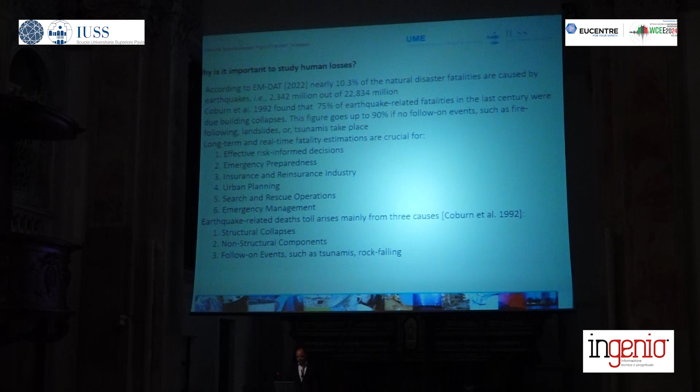And why is it important? Long-term and real-time fatality estimation are crucial for effective risk-informed decisions, emergency preparedness, the insurance and reinsurance industry, urban planning, search and rescue operations, and emergency management. Earthquake-related death tolls arise mainly from three causes, but not only from three. So the causes are structural components, non-structural components, and follow-on events such as tsunami, rock falling, landslides, and fire following.

Let me introduce you to the current state of the practice in fatality modeling, and I'm starting with a famous paper of Coburn et al. 92, where the estimated number of fatalities depends on the probability of collapsed buildings and the number of collapsed buildings, the number of occupants at the time of the earthquake, and the number of people that are trapped inside the building in the moment that the building collapses. And this parameter is really important because it is related to the building volume reduction.

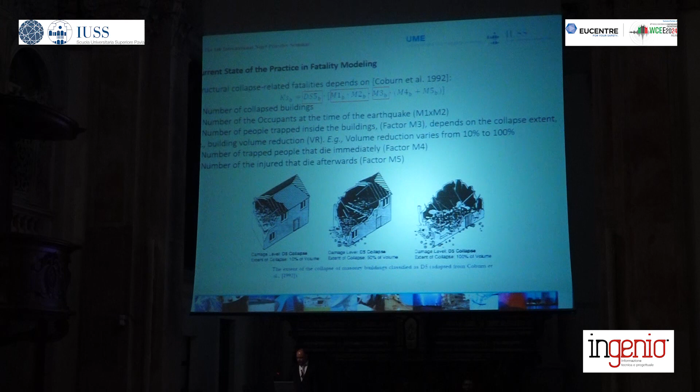So, for example, if you see the picture below, for economic losses purposes, the building is classified in damage state 5, so the loss ratio can be 1 or a bit more than 1. But when it comes to fatality estimation, going from left to right, we see that volume reduction changes dramatically from 10% to 100%. So trapped people will follow the same trend. And then it is the parameters M4 and M5 that consider the number of people that die immediately or the people that are injured but die afterwards.

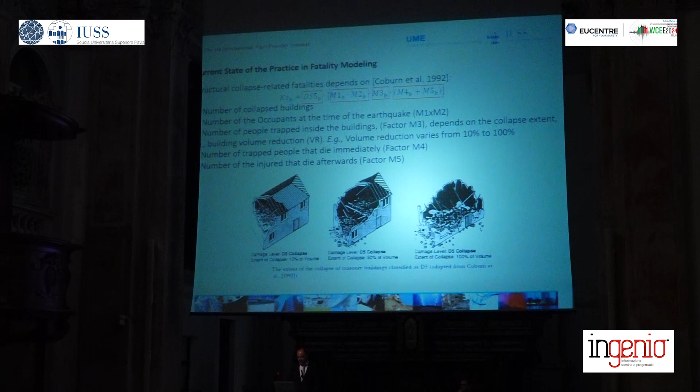So similar work was conducted by Spence in 2017, and he proposed 12 archetype buildings based on past events including the Northridge, Kobe, and Athens earthquakes. So he proposed fatality ratios. And in 2013 it was So and Spence again that proposed empirical fatality rates, completely empirical, based on a database that contains damage data for 53 earthquakes. And the novelty here, as compared to the two previous works, is that they offer fatality rates related to damage state 4. Can you see my mouse?

Okay, so this is the fatality loss ratio associated with the complete damage state. And then in 2016, in her book, So provided judgment-based empirical fatality rates based on data from 25 major earthquakes. And still, in her work, she emphasized the role of volume reduction on the fatality rates.

And then we move on to So, Baker, and Spence in their paper in 2018. Among other topics they studied in their paper, they stressed again the importance of establishing a relationship between fatality rates and the volume reduction of collapsed buildings. So, for example, if a soft story collapse takes place, 10 up to 20% of the building will be reduced. But if a pancake collapse takes place, then about 100% volume reduction. And in light of very limited empirical damage data, they encourage the application of advanced 3D analysis for collapse assessment and volume reduction.

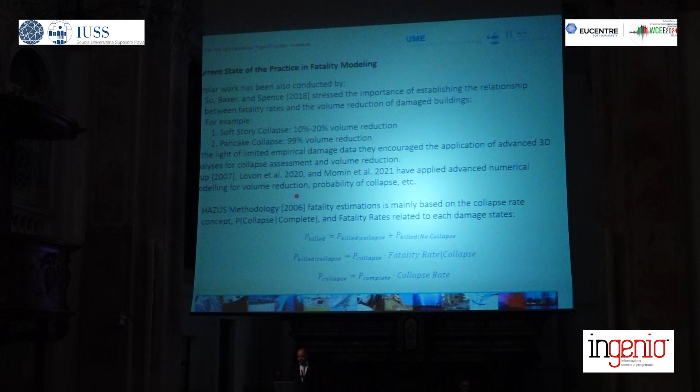And following this philosophy, Arup in 2007, Lovon et al. in 2020, and Momin et al. in 2021 have applied advanced numerical modeling for estimating volume reduction and the extent of collapse. For example, Arup estimated the area impacted by the debris and, among other parameters, the probability of collapse.

And then there is the well-known Hazus methodology for fatality estimation. They consider that fatalities come not only from collapse, but they offer fatality rates even for less severe damage states. But basically, the main part is fatalities related to collapses. And in order to estimate the probability of collapse, they establish this collapse ratio, which is the probability of reaching or exceeding a complete damage state times the collapse rate. And these collapse rates are basically 10%, 15%, which means that not every building classified as unrepairable is collapsed.

So the main limitation observed during the literature review is that the established metrics, fatality rates related to volume reduction and empirical collapse fragility functions, are based mainly on very limited damage data. And hence, these two parameters are the focus of my PhD dissertation.

Okay, and the content of the PhD is as follows. First, we will estimate empirical collapse rates and fragility curves based on a very extensive damage database for Italy, and then we will move to analytical methods. Then we provide analytic fragility and vulnerability functions, and then we verify these fatality vulnerability functions based on past events.

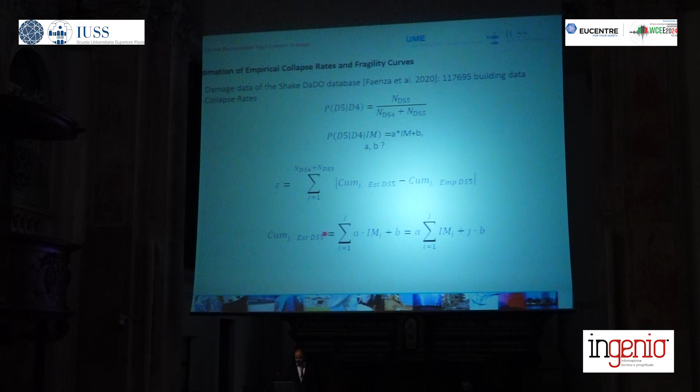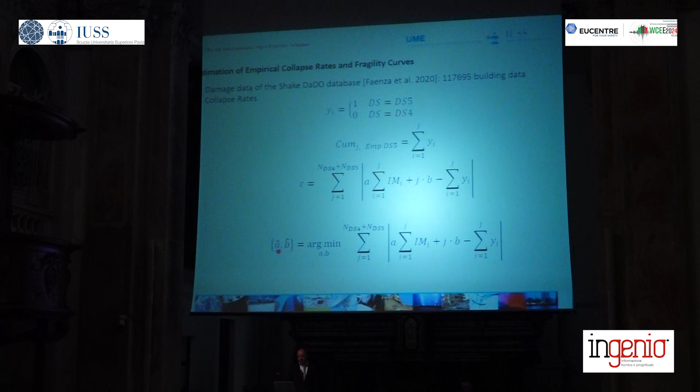Basically, this is the absolute difference between the estimated cumulative number of DS5 buildings minus the empirical cumulative number of DS5 buildings. The estimated cumulative relationship is adding up the probabilities of collapse. The empirical cumulative distribution is basically counting the buildings. And the best estimate parameters are the ones that minimize this objective function.

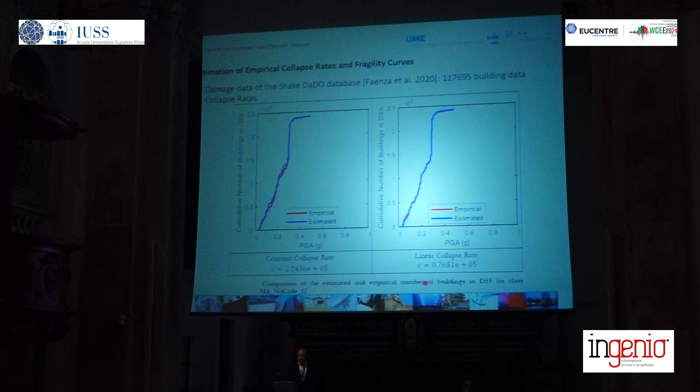In red, we have the empirical cumulative number of DS5 buildings, while in blue, on my left, we have the cumulative estimated number considering a constant collapse rate, and here considering a linear collapse rate. In terms of the error to be minimized, in the case of the linear collapse rate, the error is basically 3 times less compared to the constant collapse rate.

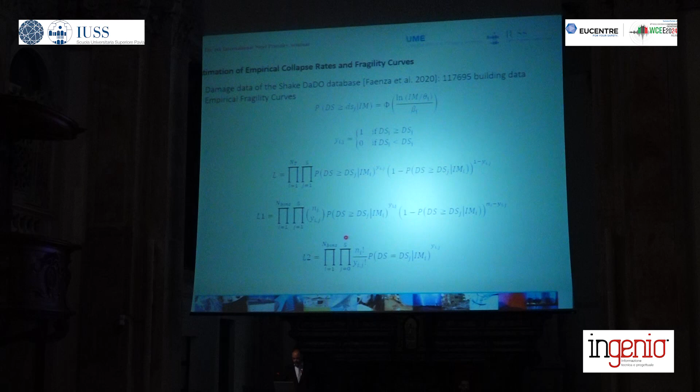So the parameters here are 5 medians and 1 standard deviation that is constant, and they are the ones that minimize this function here. We keep the logarithmic standard deviation constant to preserve the ordinal nature of the fragility curves, that is, the curves don't cross each other, and the probability of exceeding a more severe damage state is always lower than the probability of exceeding a less severe damage state.

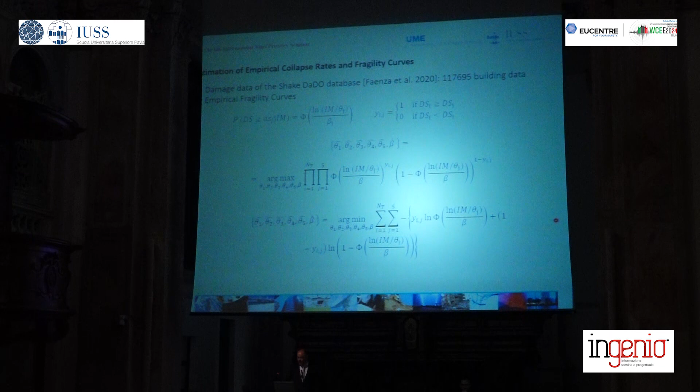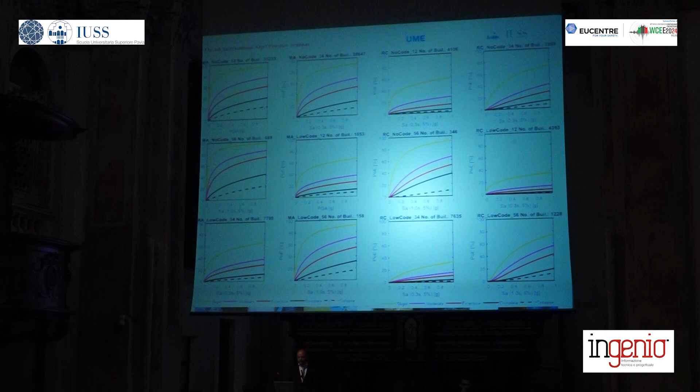And here we have the parameters for the 12 archetype buildings, and here are the fragility curves for the 12 archetype buildings, and we can see that in some of them the medians are very, very low. For example, here as well, here. And another factor that takes our attention is the logarithmic standard deviation, which is very high and gives this almost linear, flat shape of the curves.

And why might there be these, let's say, issues with our fragility curves? We think that one reason can be under-representation of undamaged buildings in the database. However, this does not affect the collapse rates. Another is the accuracy of the intensity measure computed based on the INGV shake maps.

For example, for very low intensity measures, like a PGA of 3 or 4%, we see that there are buildings that are collapsed. So we recognize the very high variability in the shake maps in the intensity measure. Anyway, I have to mention that this does not affect the collapse rates. Why? Because they are invariant to the intensity measure. But is there any way that we can benefit from these fragility curves?

I think yes, there is a way, like excluding completely the buildings that are in damage state 0 and computing conditional fragility curves. That means a fragility curve for damage state 2, let's say, given damage state 1, given intensity measure. So we can get conditional fragility curves, but in order to have a non-conditional, exact fragility curve, we have to have information about the probability of exceedance of damage state 1. So this could be done probably by numerical modeling.

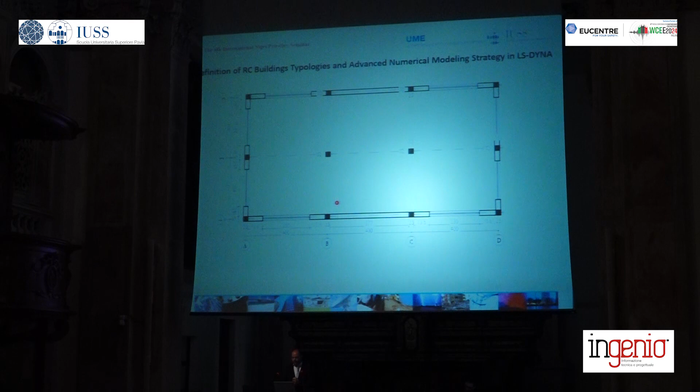We'll start with the definition of RC building typology and advanced numerical modeling. And why are we shifting from empirical to analytical? First of all, because we know exactly what the intensity measure is, because we just defined it. The first archetype is a masonry-infilled moment-resisting frame RC building typical of Nepal, India, Pakistan, a 3-story infilled building, and in order to consider adding stories to the buildings, we consider 2 more archetypes with 4 and 5 stories.

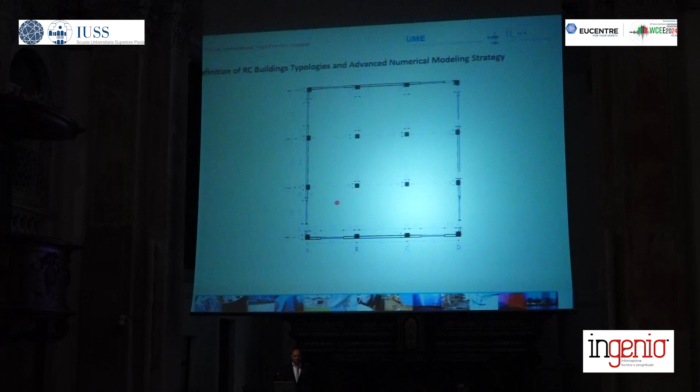Another archetype is a fully symmetric infilled RC building, typical of Italy and Europe, and this is based on the model from Tiziana Rossetto's PhD thesis. And sorry, I forgot to mention here that the information here is taken from Chaulagain et al. in 2013.

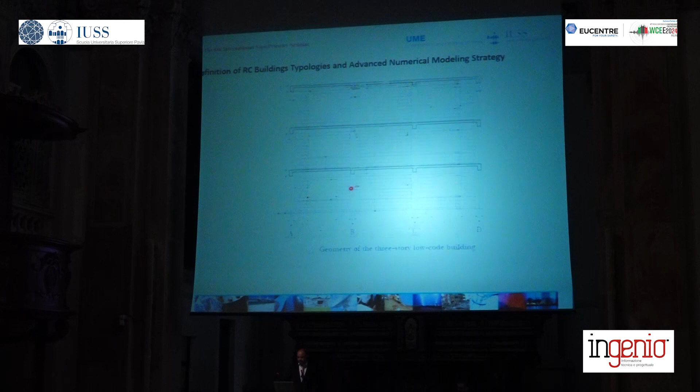What is the numerical method that we adopted? I'm going to show you what we ended up putting in my PhD thesis, but it was a very, very long way to end up with this methodology. So, to model the frame elements, beam and column elements, we used 1D elastic elements with concentrated nonlinear hinges at the ends, and the backbone of the nonlinear hinges is the backbone from Haselton et al.

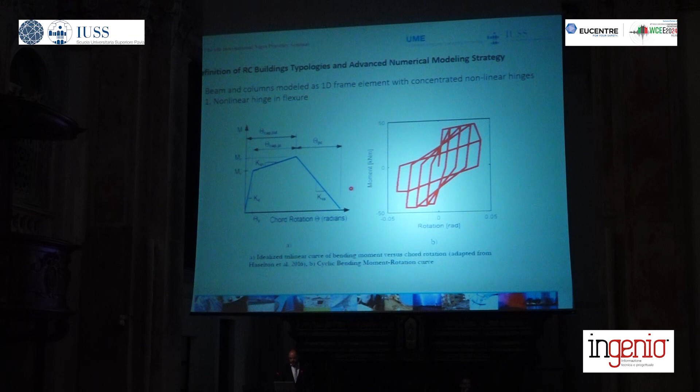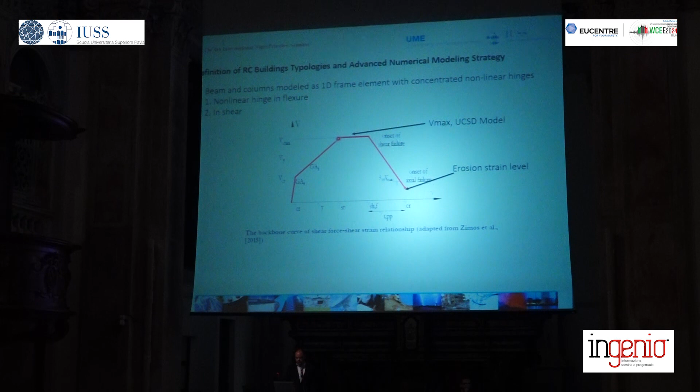2016, and here I show the cyclic response. We modeled the nonlinear behavior in shear, where the maximum capacity is computed based on the UCSD model in 2000, and this backbone curve is according to Zimos et al. in 2015, and they state that there is a point where if the shear strain hits, the column will lose its axial force capability, and so the column will not be able to carry axial load anymore.

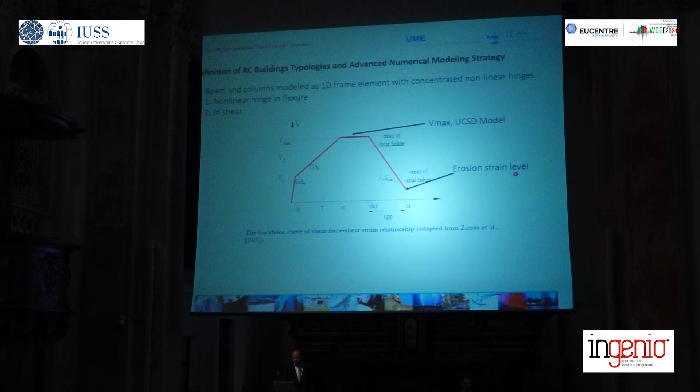And we consider this in our numerical model by imposing an erosion strain level. So the moment that the strain level hits this target here, the element will be deleted from the model. And then we have here the backbone curve in tension and compression and the cyclic behavior.

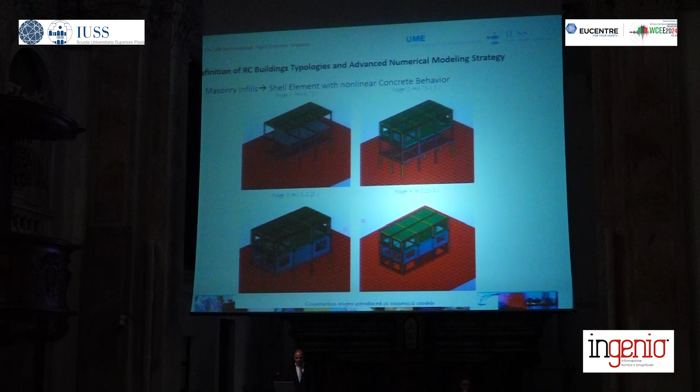In order to make sure that infills really work as such, so that they don't get extra load, but they only carry their own load, we apply the construction stages in the model. And in order to model the ground, we use shell and solid elements with elastic elements that represent the ground, and I use many different moduli of elasticity.

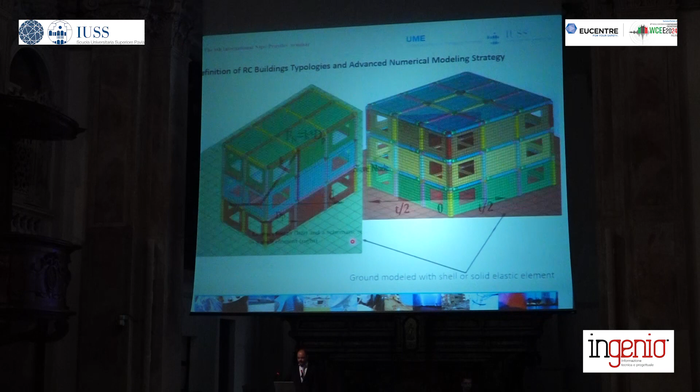In order to consider the impact of building elements with each other and the interaction of building elements with each other and with the ground, we imposed in the model the contact algorithm. Basically, the program will recognize the interaction between them.

And finally, with this part, we used around 60 ground motions for each numerical model. They are 3D ground motions, and the selection strategy was guided by the need for the uniform distribution of the selected IMs, that are spectral acceleration and average spectral acceleration.

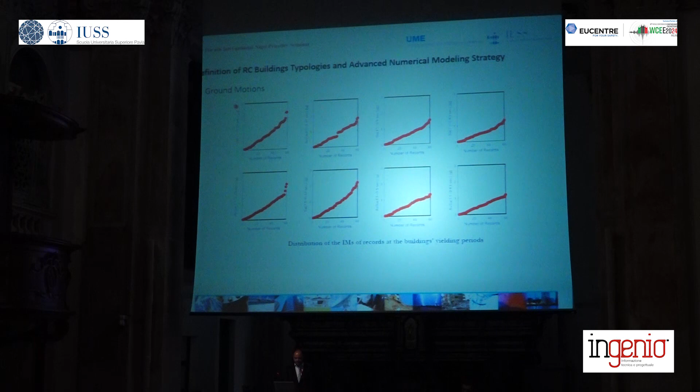And before going to the results, I would like to state that the earthquake effect in the building is treated as a wave propagation problem and not as a vibration problem. So we consider the wave speed in the building. The software is capable of doing that.

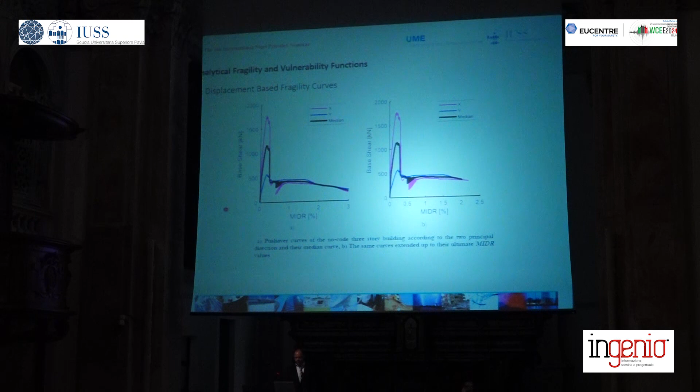So let's move to analytical fragility and vulnerability functions, and we'll start by presenting displacement-based fragility functions. This damage model is based on the maximum interstory drift, and these damage results are estimated in the median pushover curves, because the first building is not symmetric, and it has two different backbone curves. So we will work with the median backbone curve.

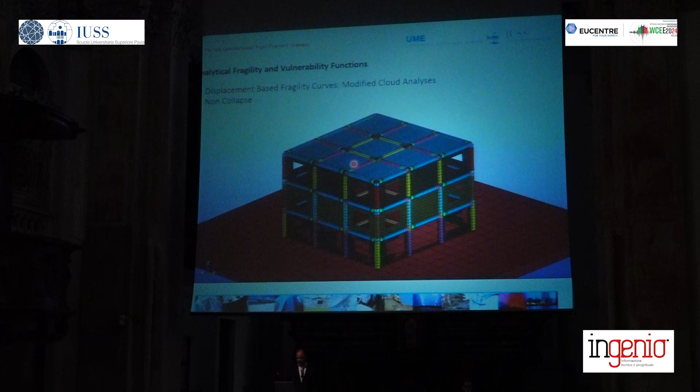And in order to estimate fragility curves, we have run cloud analysis, and we use a modified cloud approach to compute the fragility curves, where we take into account the explicit collapses and non-collapses. So let me introduce.

Okay, this is a video. It's supposed to run. Okay.

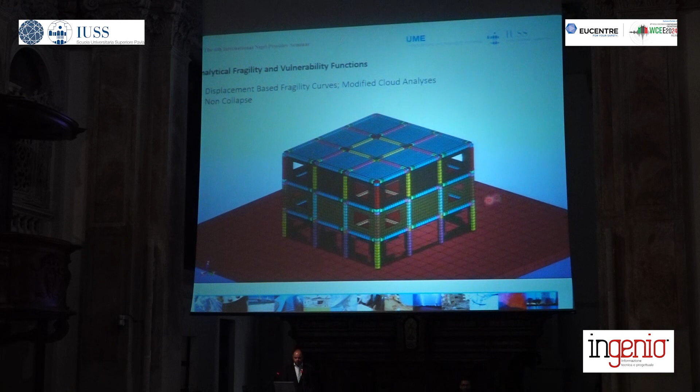In any case, this is the final configuration of the building. We see that we have lost the infills, and the infills that are missing here are missing because they are so distorted, and we applied very high erosion criteria.

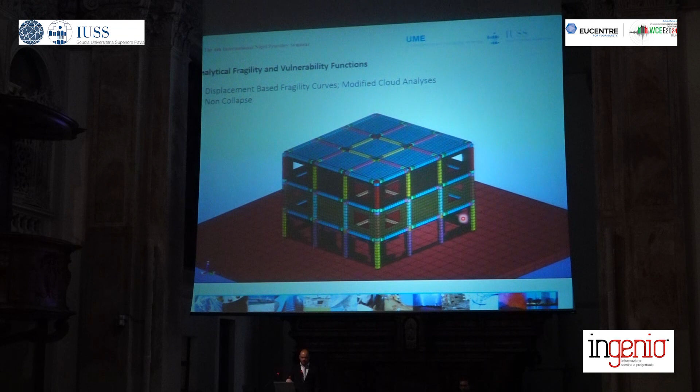Okay. So now finally it is moving. So here we applied the infills in the model.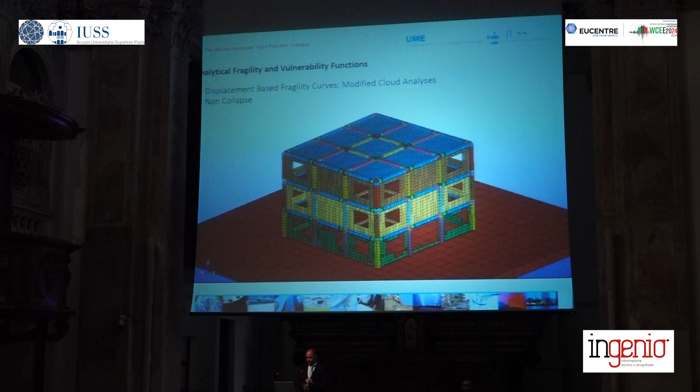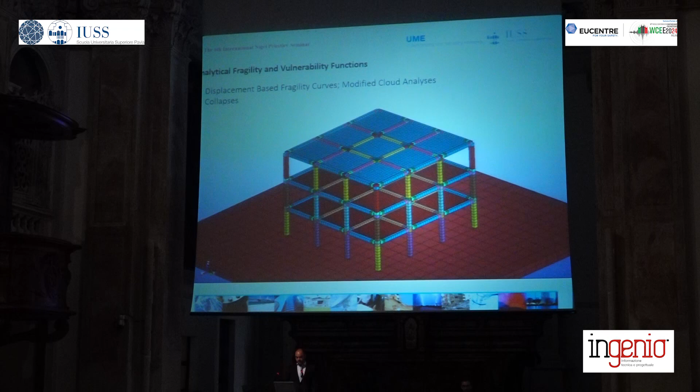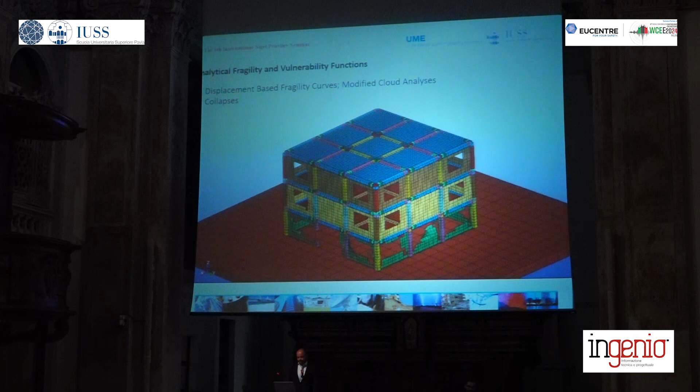Okay, let's move on to a case of collapse. So we lose the infills in the first story, the column in shear is down here, and then we have the collapse. It is a pancake collapse.

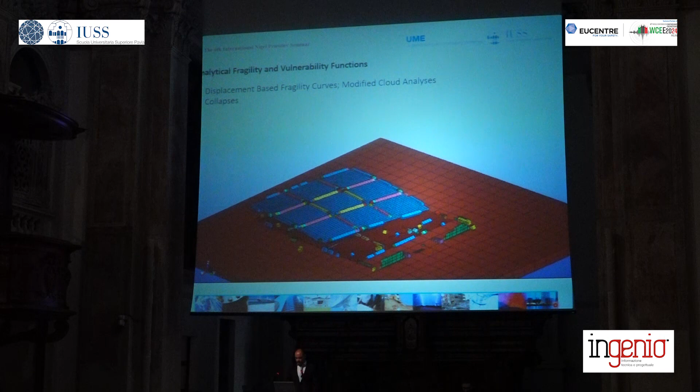Okay, let's move on with the selection of the intensity measure. Yes, the intensity measure is spectral acceleration and average spectral acceleration, but at which period are we going to compute those? For this we estimated the SRSS average standard deviation of fragility curves for various periods, and we ended up computing the spectral acceleration and the average spectral acceleration at the period where the beta, geometric beta, is minimal.

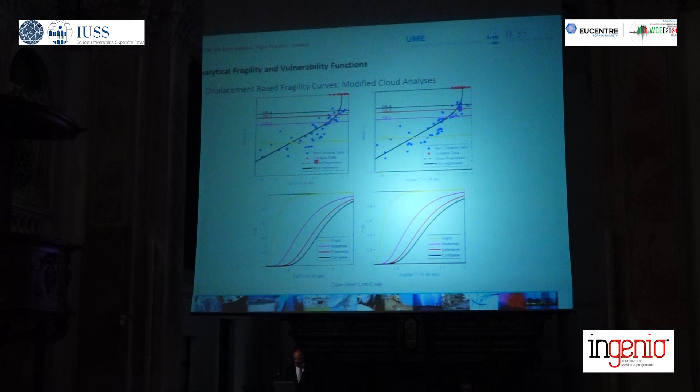Okay, and we have applied the damage model. We show the damage model here and the fragility curve for the five-story building. Another method that we use to estimate fragility curves is for damage states 1 and 2. We took advantage of the software, and we consider that damage states 1 and 2 will be characterized by the damage in the infills. So infills are considered damaged when they are fully cracked or fully spalled.

And we introduce here a parameter that is called damage area ratio, and it is basically the number of damaged infill elements against the total number of infill elements. And in order to consider the positive and negative loading direction of the earthquake loading, we say that the total number is a union of the damaged elements in the positive and negative direction. And here I will show a video of the number of cracks. Here's the pushover.

What we see, again, we focus our attention on the median damage area ratio given maximum interstory drift, the median curve, and we see that after a certain point, the damage area ratio doesn't change much. And we consider this ratio here as the ratio that characterizes the damage model for damage state 2. And what about damage state 1?

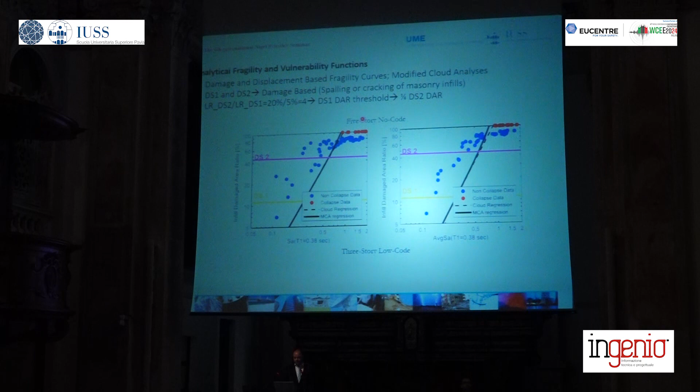So, as we said, damage states 2 and 1, we assume that they are controlled by damage in the infill, and in order to find the damage area ratio for damage state 1, we take the ratio of the loss ratios. The loss ratio is 20% for damage state 2 and 5% for damage state 1, so the area in damage state 1 should be 25% of the damage area in DS2. And here we have these two fragility curves that are computed based on the damaged infills, and here based on the interstory drift.

And let's move on to the collapse. The collapse fragility curve follows a logistic function, and is the same for volume reduction. With our modeling approach, in case the building collapses, it would always be a pancake collapse. So the probability of collapse is the same as volume reduction.

And the fatality vulnerability function that we developed, we validated it on 4 past events that we selected: the Emilia earthquake, Gorkha in 2015, Albania, and Croatia. In our exposure model, we consider only infilled RC frame buildings that match our archetype, the one that we created. The exposure models for the European buildings, so Emilia, Albania, and Croatia, are based on the European seismic risk model, while for the Gorkha earthquake, it is based on the model developed under the GEM framework.

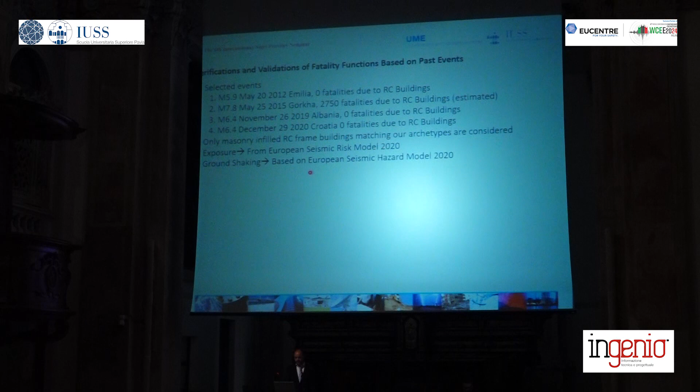And ground shaking for the European buildings is based on the logic tree and the GMP equations produced under the European seismic hazard model. And here is the number of RC buildings in the original exposure, and here are the ones that we considered. Why? Because not every building in the database matches our archetypes. And to run the scenario fatality estimation, we use the scenario risk module of the OpenQuake engine developed by GEM.

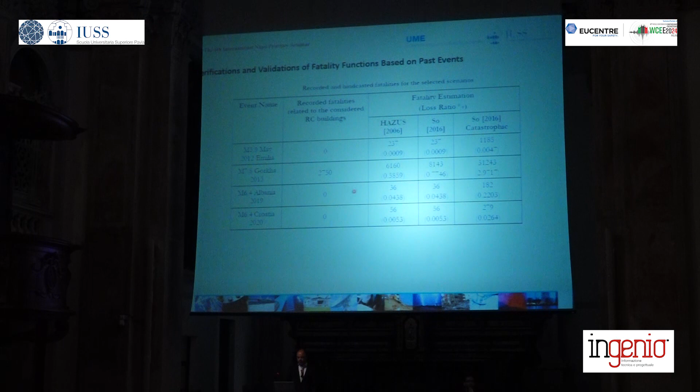Here we have a comparison between the recorded fatalities and the ones computed by the model, and we see that the catastrophic rates are completely off in all cases. For European buildings, Hazus and Silva produce identical values, whereas for the Gorkha earthquake, it is Hazus that does a better job compared to the recorded deaths. And why is there this discrepancy?

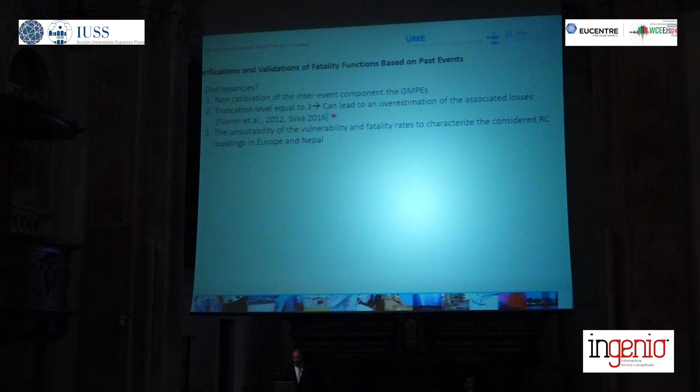First of all, we believe that there is no calibration of the inter-event component of the GMPEs. The truncation level was equal to 3, and according to Silva 2016 and Fiorini 2012, this could lead to an overestimation of the losses. And another factor that I think is important is the unsuitability of the fatality rates to characterize the considered RC buildings in Europe and Nepal.

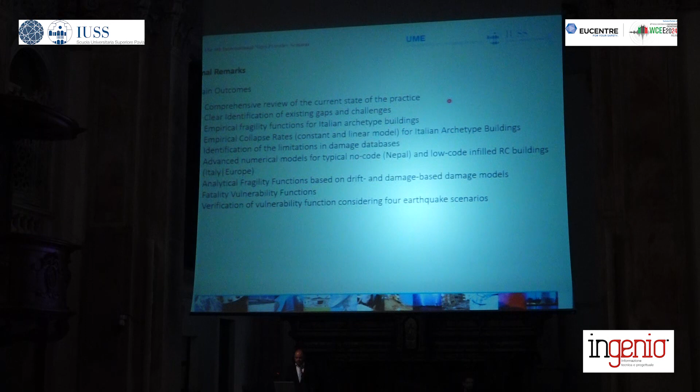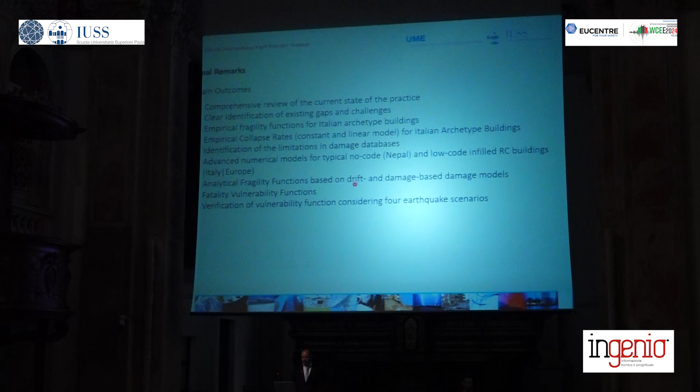So the final remarks. The main outcome of the study is a comprehensive review of the current state of practice, clear identification of existing gaps and challenges, empirical fragility functions for Italian archetype buildings, collapse rates, identification of the limitations in damage databases, advanced numerical models for typical buildings in Nepal and infilled buildings typical of Italy and Europe. And we developed analytical fragility functions based on drift and damage-based models. We produced a fatality vulnerability function, and we verified this vulnerability function.

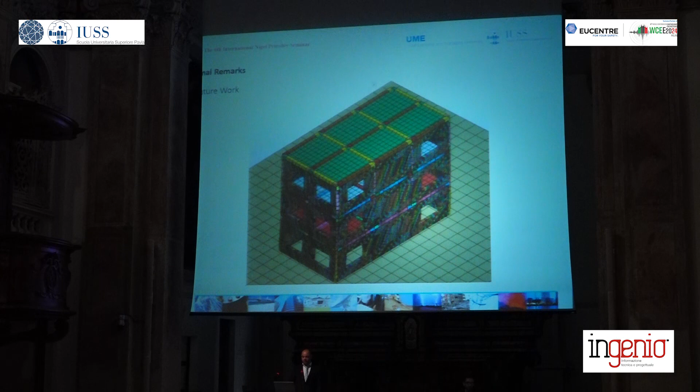And for future work, we intended, even during my PhD, but it was impossible with the computational power we had at the time, to run a more advanced numerical model. As you can see here, we were able to capture a soft story. However, I would like to mention that this is a confined two-story building and not infilled, and here you see the bricks, the columns on the ground, so this will be the focus of our work.

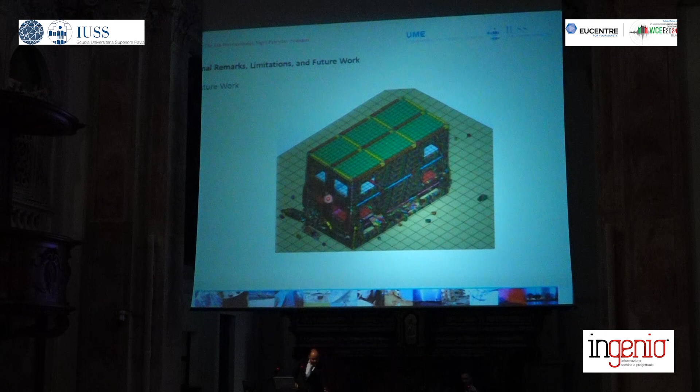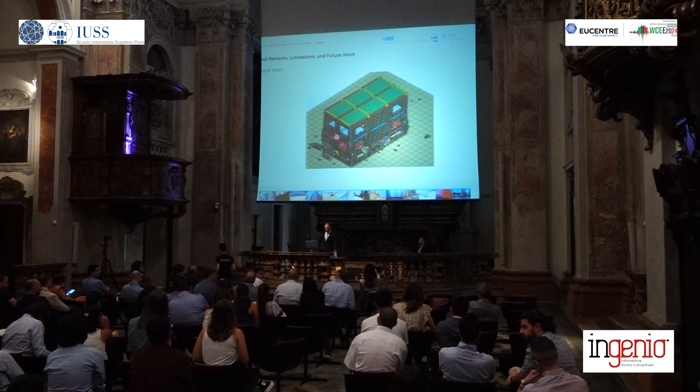Thank you. First of all, congratulations for reaching this point, to you and to all of your colleagues. It's a very important achievement for every student.

You have worked on a very interesting topic, with interesting work on the estimates of collapse and fatality rates, fragilities and vulnerability, which depend on so many variables: the hazard, the structure, the occupancy, and so on. You have made a good overview of past efforts in fatality modeling. And then you have used empirical estimates and analytical and numerical estimates. So quite a number of points to ask questions about, and I have a long list, but I will restrain my curiosity and just ask a few of them.

So first of all, you started working on the existing empirical data, and the database that you have used. It's super interesting. I give my compliments to all the contributors who have developed it before. It is a huge and extremely interesting work.

Now, you have tried to use this empirical data, but the results that you have obtained in terms of the fragility curves do not seem so realistic. Do you have any comments and suggestions on how to improve it?

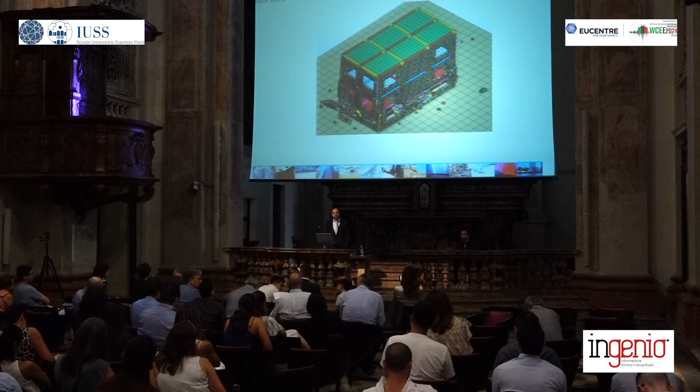Please, could you rephrase the sentence? Yes. So in the final chapter, you have the validation with empirical results. Did you look into other possible methodologies to make this comparison of fatality rates with empirical data? Because in 3 of the events there are no fatalities, and you have a large number of fatalities, and in the events where there are a significant number of fatalities, you have a much larger number of fatalities. So, have you looked into other possible approaches to deal with this?

No, we didn't do that. We just ran a simple scenario with a fatality vulnerability function and with the exposure model that was developed by other institutions. The only thing that we changed was picking the models that we thought would match closely with our models, and other than that, we haven't seen other stuff. Okay, thank you. I'm satisfied. I don't know if you have any other question.

Yes. I have more than a question, a suggestion. Firstly, why did you make this choice to use LS-Dyna? Because of the explicit solver, to be able to run. Yes, but I said this because it complicates a lot. You need to take into account, for a better analytical model, the interaction between shear and flexure, for example, whether shear acts on your building before flexure or the contrary, depending on the characteristics of the building, and the influence of normal forces in columns together with flexure.